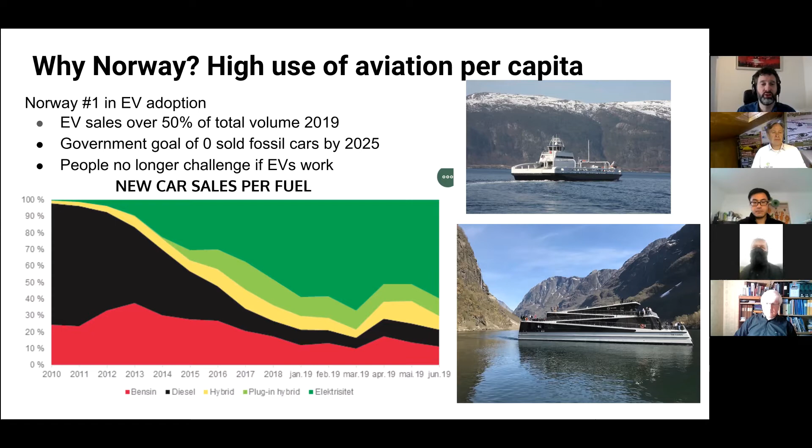So now the next challenge Norway will set forth to do is to have zero emission aviation, and that's the hardest one. We will try this to solve two problems. In Norway, one problem is that we are polluting with the CO2, but the other one is that we need to do business in Norway. Norway is a very long country, which has a lot of people spread out to the north, very far north.

That means that if they're going to do business there with the fishing industry, the salmon, shipping industry, oil industry, and tourists, then you need to travel a lot. The roads are narrow, and it will take you a lot of time to travel around in Norway where we are doing business and living our life. So aviation is part of the infrastructure. Norway has a very high use of aviation per capita. We are using aviation as if we were 10 times more people in Norway. So we are 5 million people in Norway, but we are consuming aviation as if we were 50 million people.

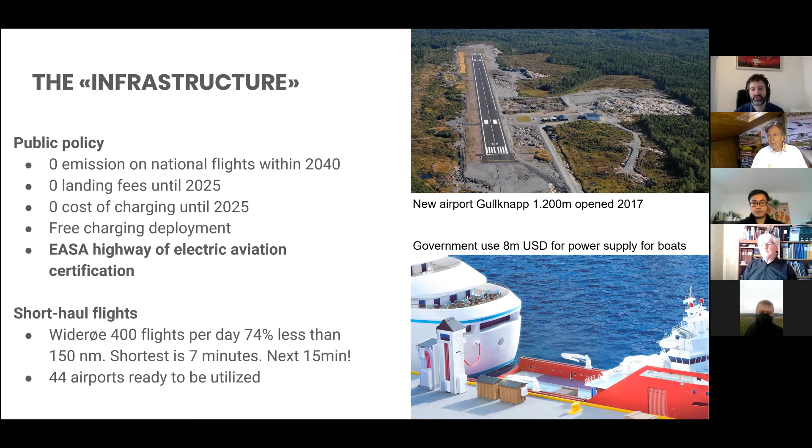I would just skip to that part. This report is summarized in English. One thing is that Norway wants to take a leading role as an arena for developing this technology and the market potential. We have said that by 2040 we will have zero emissions on all domestic flights.

And we will reduce the 5% we have of total emissions by 80% for Norway. So there is a big goal, a reach goal, but we will try to make it true.

We have said this covers two different areas: technology development, which is the hard part of getting certified planes and the tech to work, and also getting the different players on the field together - the battery management system, the engine, the airframes, and also the operators of aircraft, and general aviation for the smaller planes, which we try to order 18 planes from Bye Aerospace to see what we can do with the Norwegian clubs that have fractional ownership and different ownerships of planes.

We are also a member of the Nordic Network for Electric Aviation, which Hans is also a member of. We've had some meetings and fine discussions about how we can do this for the Nordic market, which is a big market in the global perspective. So I'm really looking forward to the future work there with Hans and all the other people.

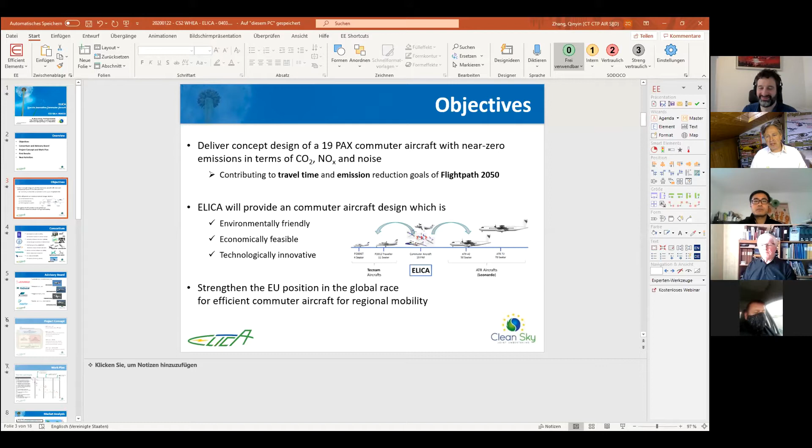So perhaps now, Qinyin, you could unmute your phone and share your screen. I unshare my screen again, and then we could hear, because Qinyin is working for Rolls-Royce Electrical, and at Rolls-Royce Electrical he actually took over, or better you explain it to us what you're doing there. I think it's better than if I describe what you're doing. So we have the right screen, but you have to unmute your phone still because we don't hear you. Qinyin? There is a button at the left corner of the screen. Now it's unmuted, yes. And now please change to the other screen again, because now we see your working screen. Okay.

Great. Yes, okay. Perfect. My name is Zhang. As Willi introduced, I'm working for Rolls-Royce Electrical. Actually, we were a department of Siemens called Siemens e-Aircraft. We've been taken over by Rolls-Royce in October last year. So my role at Rolls-Royce Electrical is responsible for the business area commuter. At the same time, I also have the technical responsibility, for example, acting as a project coordinator of this EU-funded research project called ELICA, Electric Innovative Commuter Aircraft.

And within this project, we perform various studies, starting from market research to aircraft design. And the goal of this project, as described by the tender, is to deliver our PDR, preliminary design review stage aircraft design with near zero emission.

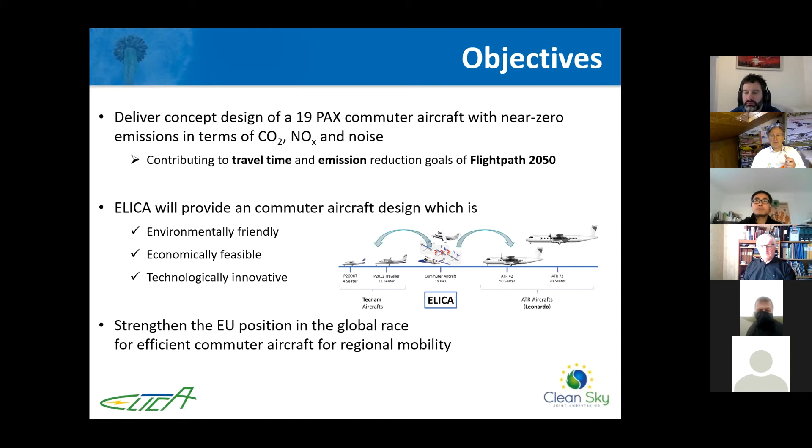And since it's an EU-funded project, of course the goal is also to strengthen the EU position in the global race for electrification of regional mobility.

So here's a short description of the project consortium. In the lead is Rolls-Royce Electrical, located in Germany. We have various experience from the past; for example, we brought the Extra 330 LE aircraft into the air in 2016 already. And this year, another world record breaking aircraft is going to be airborne, which is called ACCEL.

And in the consortium, we have very strong partners like the University of Naples, which has extensive industrial experience through their collaboration with Tecnam and Leonardo. They have both numerical capabilities and also wind tunnel hardware for simulation.

And SmartUp and Air s.Pace are two different startups. SmartUp is specialized in computational simulation and optimization environments. And Air s.Pace is a startup which delivers the silent air taxi concept with a 4-pax commuter aircraft for the regional air mobility.

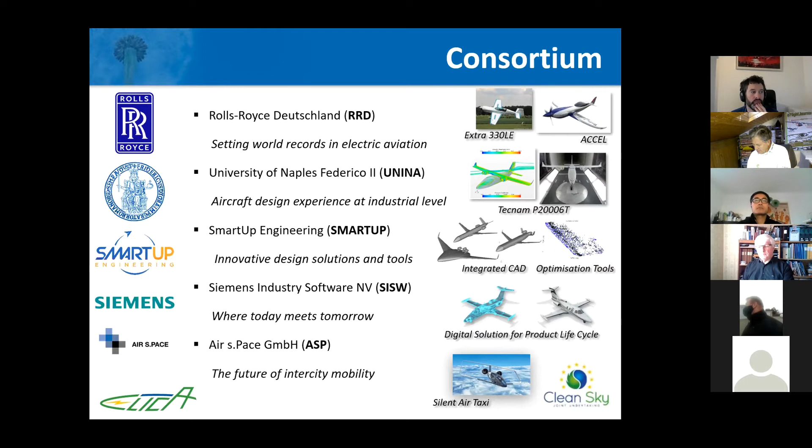Last but not least is Siemens Industry Software, which provides a lot of software solutions accompanying the product lifecycle, starting from digital twin to manufacturing software. Also within this consortium, they are developing an innovative electric architecture design tool, which has an in-the-loop failure mode analysis, so that you can be sure the architecture solution will satisfy the certification rule with a certain failure rate.

And this project also has a very strong industrial advisory board: Leonardo Aircraft, Tecnam, Piaggio, and Evektor from different European countries. Actually, all the bigger propeller aircraft manufacturers are present here.

Okay, so I'll go to the next point. As I stated at the beginning, the project is quite comprehensive, and it starts with a market analysis, which is also a quite good follow-up to the presentation of Eric and Hans.

So if we look at the regional air mobility, are we sure that once we deliver our air taxi aircraft design, it has market potential? So there are tools for transportation system analysis that can analyze different transport means.

By the way, do you see my mouse? Yes, okay. So if you discretize the whole European continent and divide the geographical Europe into discrete points, each point has a population density and access, you can use an open source data bank, for example OpenStreetMap.

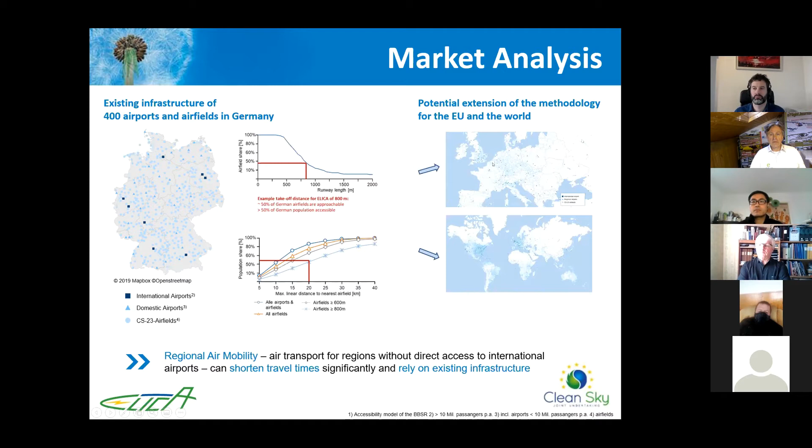And the same analysis, of course, once you establish the analysis framework, you can deliver for Europe, with the distribution of airfields across the whole of Europe, and we can even extend the analysis for the world.

So we just picked two special countries which are promising. One, let's say, Eric also identified - probably his home country, by accident - Norway.

He already analyzed Oslo to Trondheim and all the short-haul distances. We totally agree with Eric - Norwegian people are really enthusiastic about flying, and they have a lot of quite busy routes in Europe on very short distances, below I think 400 kilometers. So from this point of view, it's really a promising country to have electric commuter aircraft applied.

Another interesting country is the UK, especially Scotland, with distributed islands and airports on them. Lastly, I found they also want zero emission aviation by the year 2040, so they can be a geographical competitor to Norway in establishing zero emission aviation.

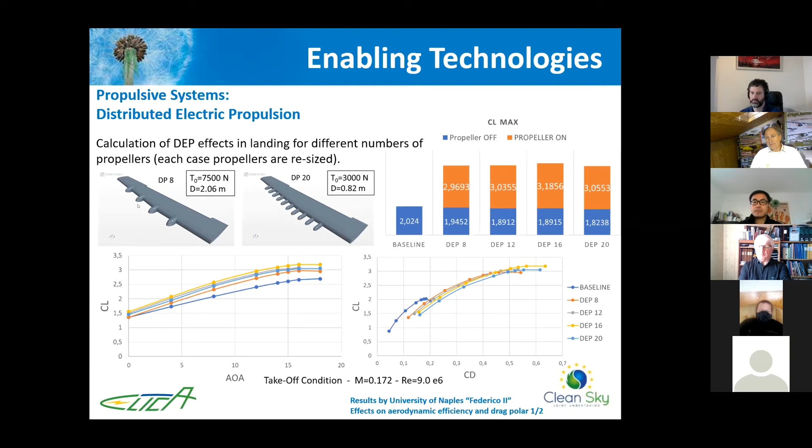Actually, if you see here, the maximum effect can be seen with 16 distributed electric propulsion units, and so on. So we are confident we have the tools to capture this kind of effect. Another case study also showed that for this kind of aircraft, the tool can capture, analyze and optimize the aircraft design.

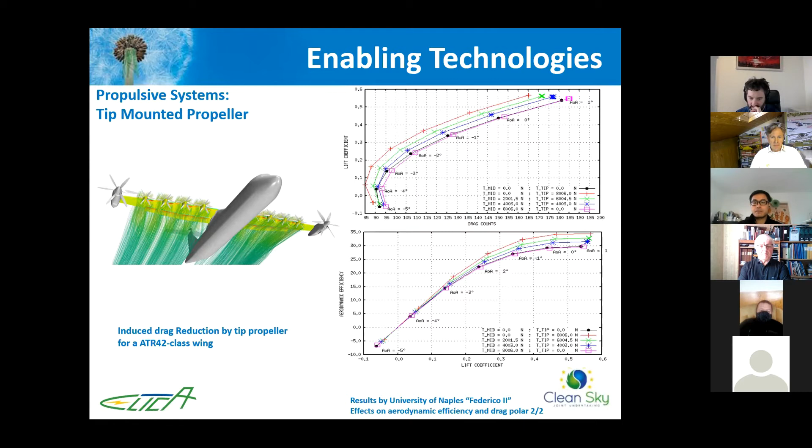For example, Siemens Industry Software is developing an automatic system architecture analysis tool. You can easily detect the failure probability already in the very early design stage, so that if you have analyzed thousands of possible architecture solutions and already detected their potential failure probability, you can then concentrate on a much smaller number of proposed solutions and focus on detailed design. You see here the failure rate is around 10 to the power of -8, which could satisfy the

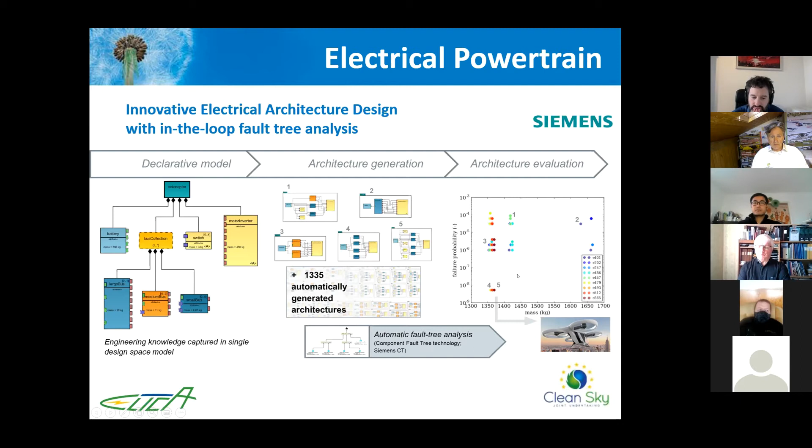certification rule. Then from the system architecture, you have the EPU level. EPU means the so-called subsystem, which consists of an electric machine, inverter, and cable. On this level, we also have the analysis and optimization tool.

To sum it up, we have used this tool for the Centerline project. It's a passenger aircraft with 8 megawatt propulsion power. One finding is that the cable weight can be very dominant, even more than half of the system weight, let's say 65%. If you choose the accordant voltage level, for example 2000 volts, you can significantly reduce the cable weight so that you reach the system optimum. Here what you can see is the system Pareto front.

We are adapting this tool to the commuter aircraft. What you see here is a Dornier 228. We have performed a whole architecture design loop for this kind of aircraft. The goal was to replace the left propulsion unit, the turboprop engine, with an electric propulsion unit with batteries and a generator on it, and we already finished the first concept design.

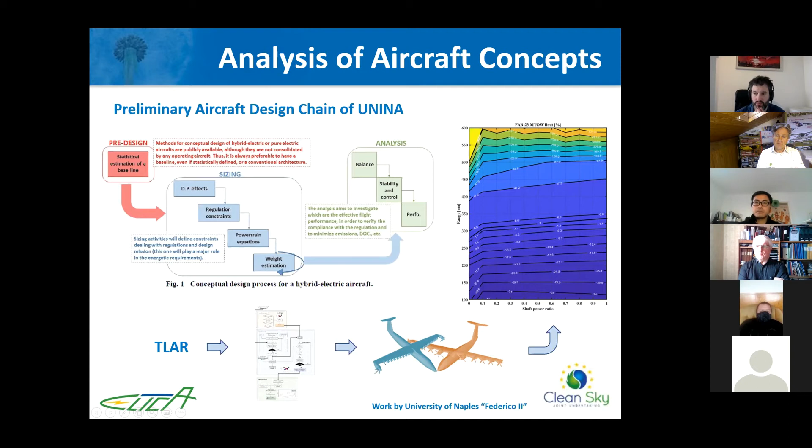experimental concepts and analyze their performance. We already have some intermediate results, but I want to skip that for this discussion. Thank you for your attention.

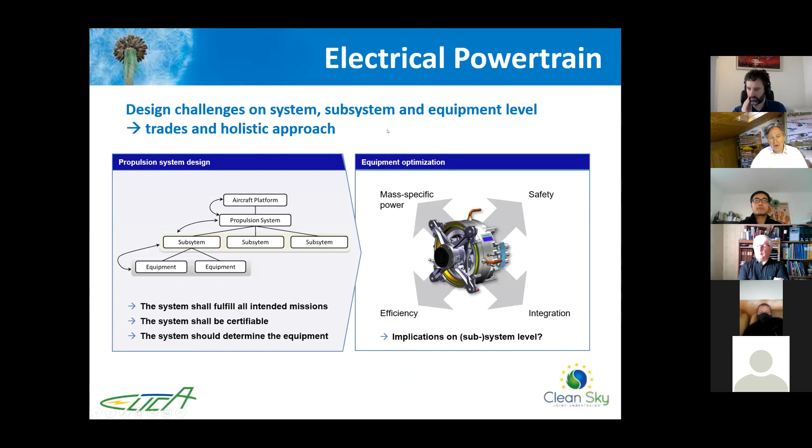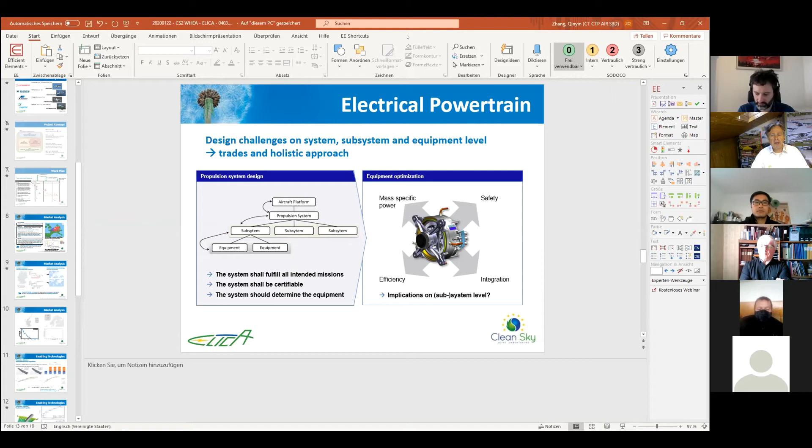That's very interesting, and a good add-on, because when we talk about the market potentials in Norway, we also have to talk about what is possible on the technical side. I already have several questions on Qinyin, but before we go to the questions, let's give Martin a quick chance to give us some explanation on his aircraft, the Phoenix, which was flying in Sweden and Norway recently. This could be, or will be, one of the first aircraft flying on the Norwegian market. Qinyin, if you stop sharing the screen, I could put in some images of the flying in Norway while Martin talks, and you could give us some explanation, Martin.

Okay, hello, I hope you hear me. We are on the airfield. Sorry, we were supposed to fly today, but the weather is not so good, and the temperature is really low.

So what to say about our airplane? In 2010, we had a dream to make an electric plane, and because we didn't know how difficult it was, we just did it. I don't know if we would start it again if we knew what we know now. But it's really challenging, and finally the final version of Phoenix has very interesting parameters.

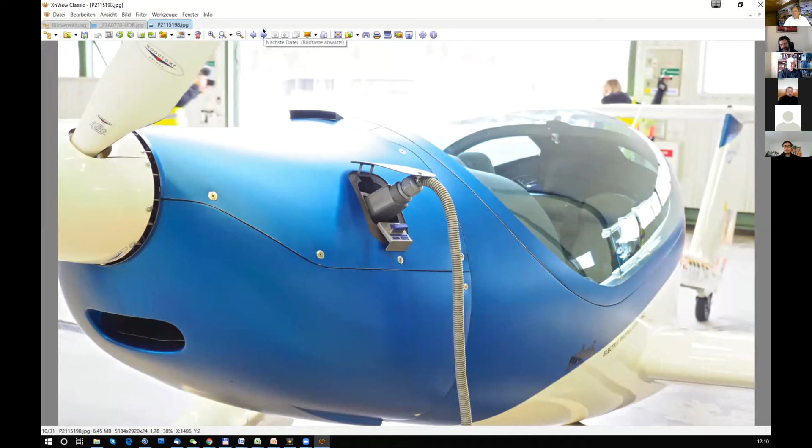We've been able to make very nice flight testing in Sweden and Norway, and I have to say thank you a lot to Hans and his team, because they allowed us and helped us obtain the permission to fly in Sweden and Norway. We also obtained permission to fly on International Airport Bromma, where we did a very nice presentation, flying over Stockholm. It was really something unforgettable.

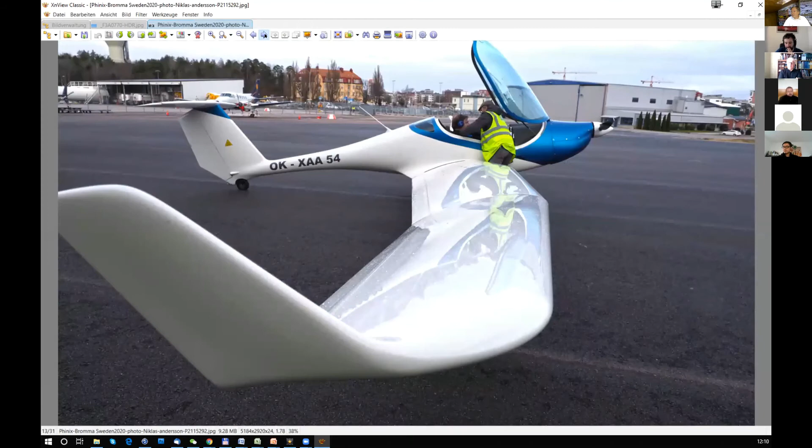About technical parameters, we have 35 kilowatt-hour batteries, which allow us to fly for 2.5 hours with some small safety reserve. I'm normally flying about 2 hours. For one charge, we can do over 10 takeoffs with 2 persons aboard.

So I can say we are at the beginning of the chain, where you have big airplanes like 20-seaters, then 4-seaters. We are at the beginning with our small 2-seater, which is suitable for private electric flying, sport flying, maybe also training.

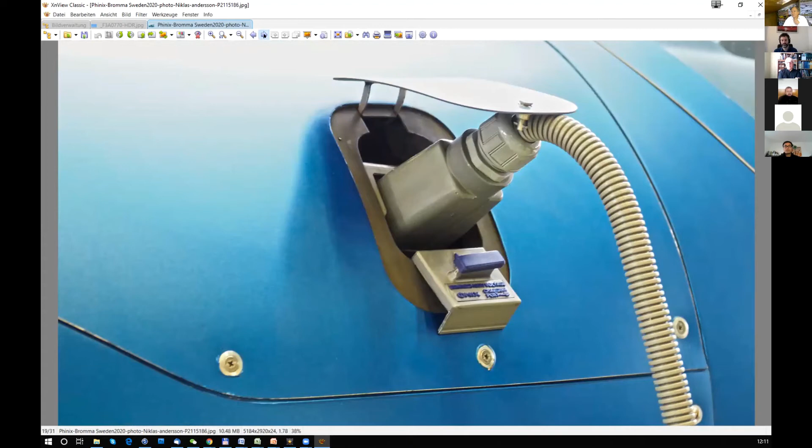The idea was that even if we are not aiming to do maximum length flights like 2.5 hours all the time, one thing is to have a plane able to do it, and another is to make the lifetime of the batteries as long as possible. To achieve this, you cannot use the battery from 0 to 100% all the time. Ideally, you recharge to 100%, but then discharge to about 20-30%, and then start charging again. You don't go to 0.

So after 1 year of flying, I can say it's working perfectly. I enjoy every minute in the air. We now have over 100 hours.

To make it universal, we followed the system used on the Rotax version, which has a removable wing extension, so you can fly as a normal plane with 10.6 meter wingspan, up to a motor glider with 15 meters, and in future also 17 meters wingspan. You can change it very easily, it takes 2-3 minutes to change one plane to the other, because the wing extensions are very light and easy to exchange.